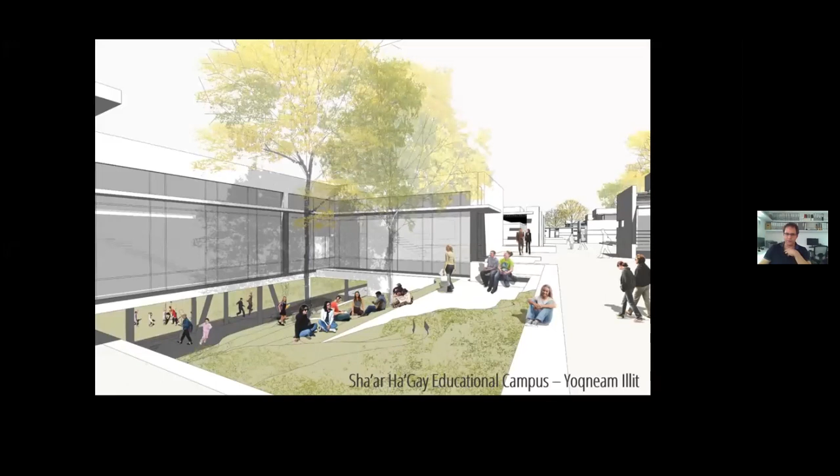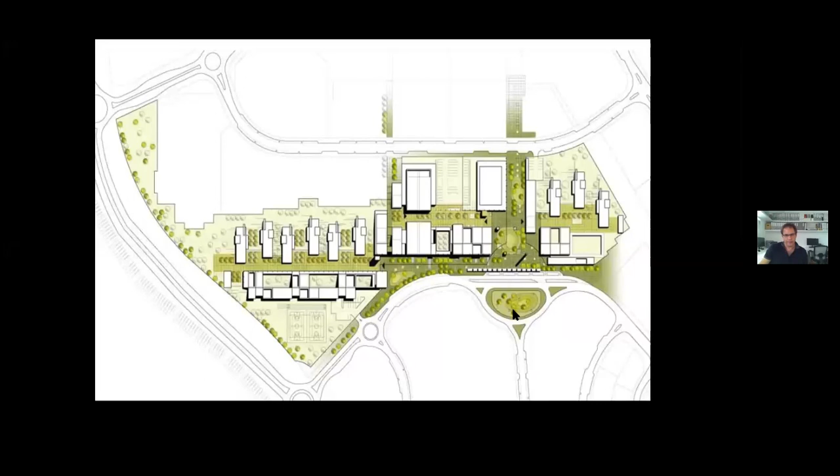Ever since we started our practice in 2005, the first thing we did was participate in an architecture competition for the design of a quite big educational compound in the northern part of Israel, for which we gained second prize. It was very surprising for us, being the first thing we did upon establishing the practice. Even though we didn't get the project built, it was clear we wanted to establish ourselves in public buildings rather than other aspects of architecture, even though for young architects like ourselves, it's usually easier to start with small projects, above all single houses.

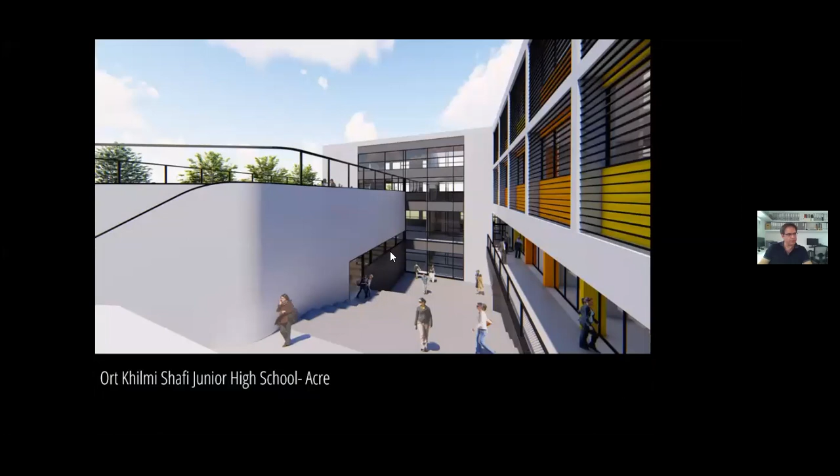So we did also that, single housing, but never stopped reaching out for architectural competitions, because we thought that would be the best way for us to get into this field, which is usually handled by more experienced and bigger offices.

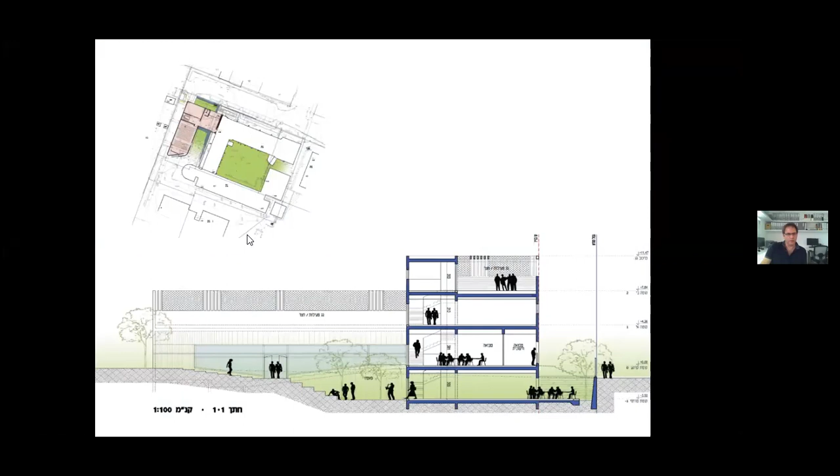Here I can show you an addition of a wing to an existing school in the city of Akko, an ancient city in the northern part of Israel, an old town. You can see here the old moat with an existing educational compound to which we needed to add a laboratory wing to an existing junior high building. So we thought to have it around an inner court, giving this school an additional and valuable inner space as well as the building itself.

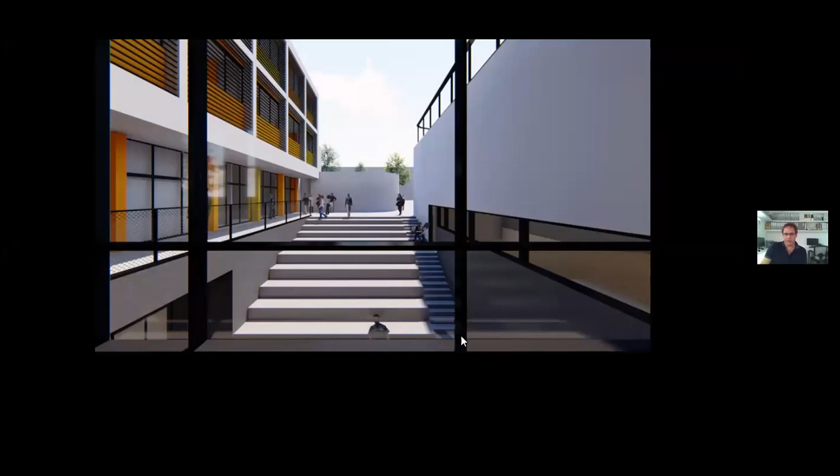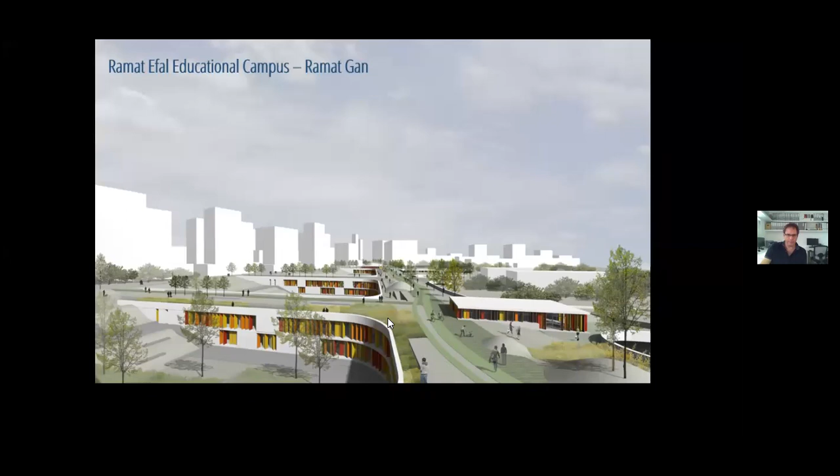Another educational building was this school in Ramat Efal in the center of Israel, where they had this big park where the project should have suggested a school. We thought to leave the park to the civilians and construct the school underneath, making the two projects work together.

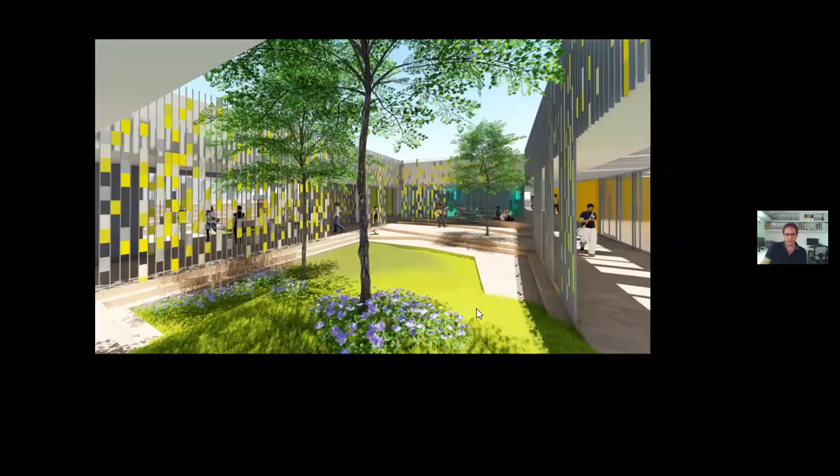Another school, the School of Music in Akko, still Akko, the town from before, is focusing on inner courtyards, which are very typical of Mediterranean old and ancient towns and cities.

Among the competition entries, we also managed to here and there get a hold of projects that we were able to construct.

This is a daycare center in a very dense neighborhood in Haifa, one of the three biggest cities in Israel. Most of the neighborhood looks very dull and unnoticed in colors and shapes. We thought to landmark this building by introducing unique colors that would attract attention and make it a landmark in the midst of the neighborhood.

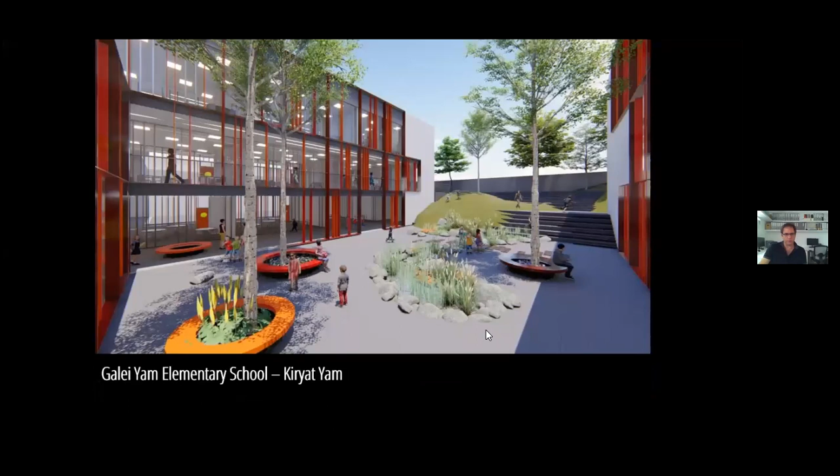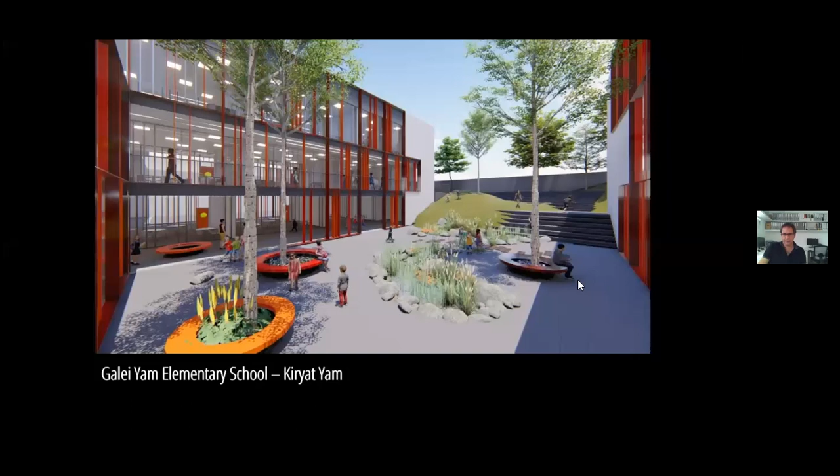Another competition that is currently undergoing, we're waiting for the results to be announced, is another school in Kiryat Yam, another northern municipality in Israel. It's an urban school, meaning high rise, and we tried to make it with as many courtyards as possible to open it up given the lack and shortage of spaces.

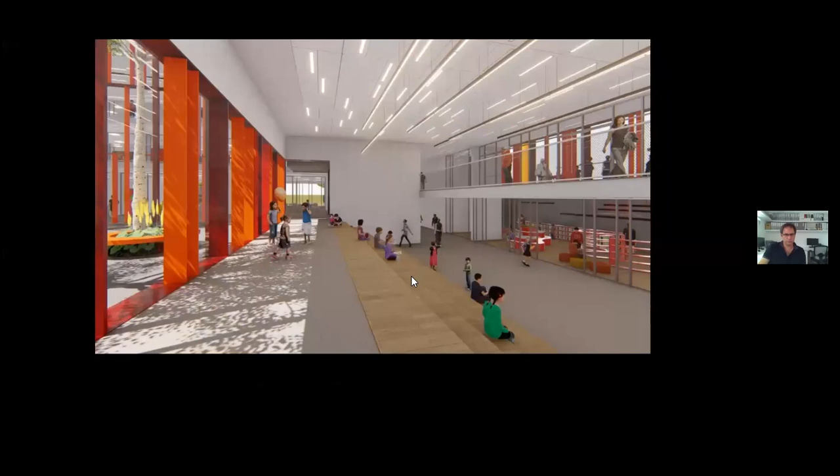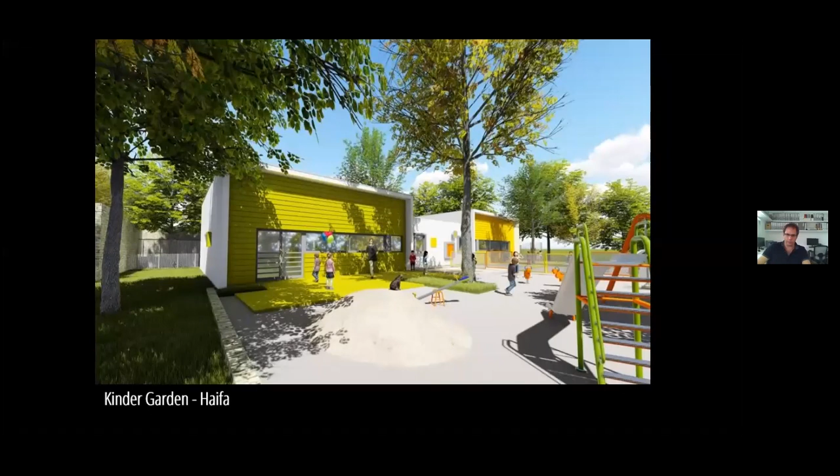Many kindergartens as well as daycare centers were built in Israel in recent years because it's a very growing population. This is an example of one such kindergarten, which was not realized in the end.

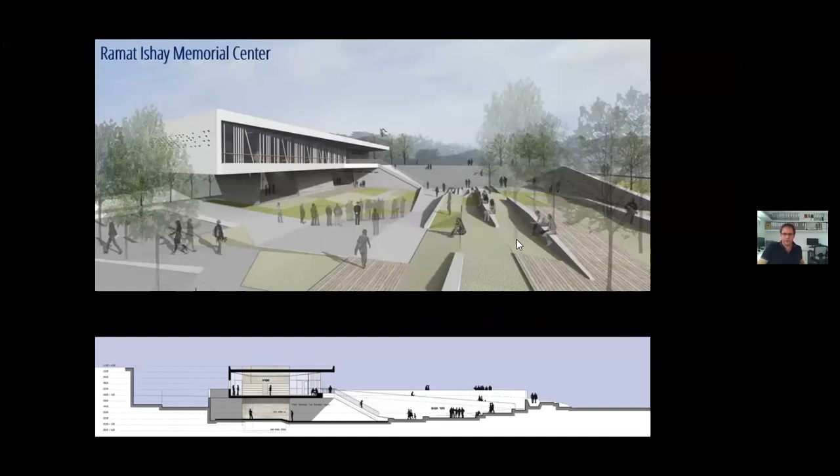A memorial hall in a very small town. It's a small memorial hall, also a competition.

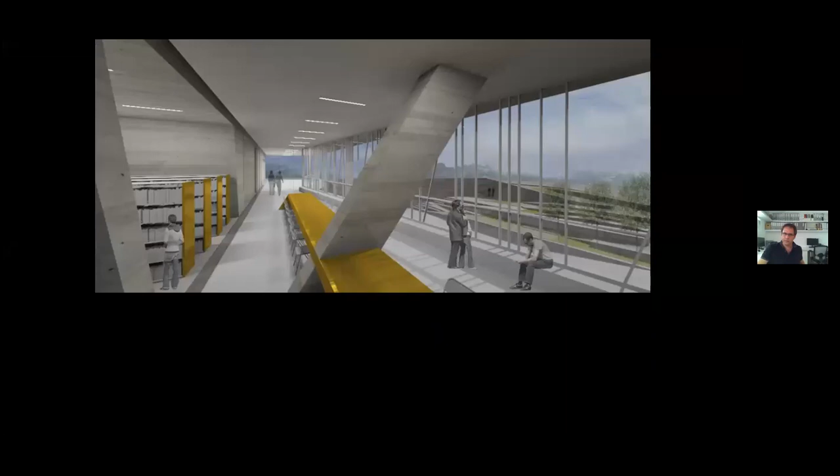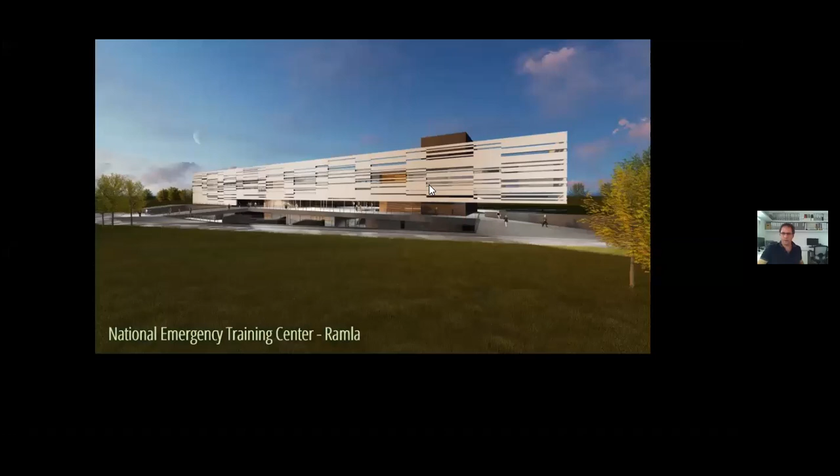And last but not least, a competition for the design of a national emergency center in the center of Israel, where they should train the municipalities to handle disasters and extreme situations such as earthquakes, tsunamis, and wars, including launch of missiles upon the civilian population.

So let me now continue. You see this? No? Well, I'm having some. Okay.

I will now elaborate on a project that we recently finished in the city of Haifa in northern Israel. I don't know how many of you know Israel. Haifa is the third biggest city in the country. It's not far from the border with Lebanon. And the project is in the midst of the metropolitan center. It's a port city, Haifa.

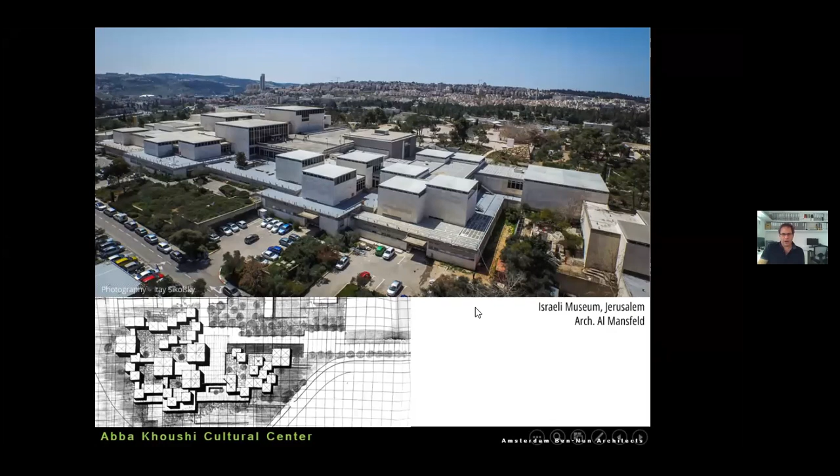And the current cultural center is called the Abba Khoushi Cultural Center, which also answers to the same conceptual themes of structuralism.

It was originally designed as a very big balcony, with the entire project dropping below, and one would access this balcony from the street and enter these pavilions and go down for all the functions and possibilities that were underneath it within the center itself. It was sitting on the slope, and this way the slope could hold all these spaces and functions.

During the years, this balcony was leaking, and all the water went down to the halls below. During the year, the municipality had to cover it with a roof in order to prevent water from going in. So this space formed beneath this roof was kept like that for many years, provisionally used for various reasons, but never really taken care of systematically. It was very hot in summers, very cold in winters, not air conditioned, not properly serviced by electricity — a very potential resource that was never used. Our mission was to convert this into a functional part of this cultural center, which is very important in the life of the city.

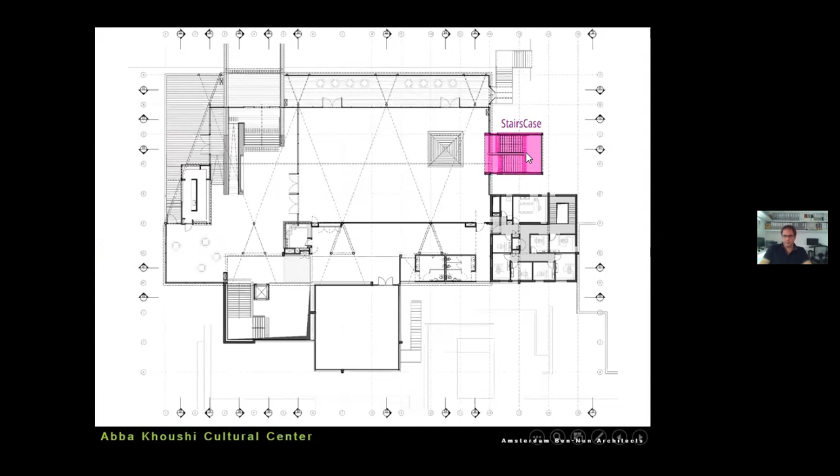Another important thing was to add a connection between the upper floor and the lower floor where the main auditorium exists, which was not under our mandate of design. Up until that moment, people would go from the entrance straight to the stairs below and make their way to the auditorium in a non-direct way. So we found this spot in order to add these stairs, only to find out it was above the route of a street going underneath this existing cultural center. So it had to be taken under consideration regarding construction methodology, etc.

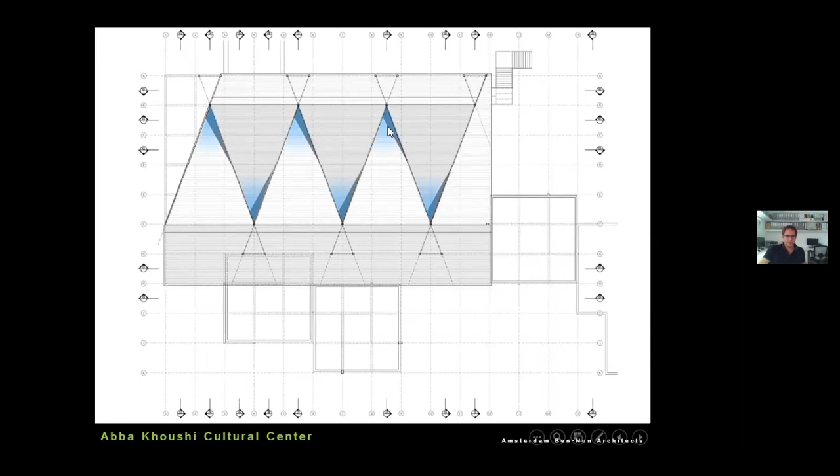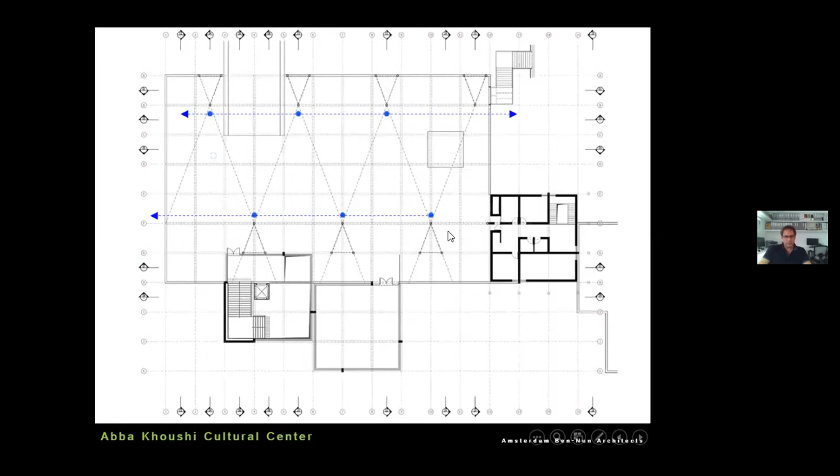One very important aspect of the design was that the existing roof, constructed about 20 or 25 years after the original building was completed, had a geometry that created 6 basins of drainage. These 6 basins of drainage were falling inside the perimeter of the existing hall. They used to solve this problem by putting in drainage pipes that would take the drainage from all these basins and get them outside. We didn't want to maintain this solution, because we knew the minute we made all this renovation, all the leakage from these pipes over the years would continue within the renovated building, and that was out of the question.

So what we did was analyze the structure of this very unique roof and found that, as shown in red — the existing trusses — if we heighten the ridge within the axis at the center of this roof, and add supporting trusses above the existing one, we can change the drainage scheme of the building and send the water outside its perimeter. That was a very important decision to make.

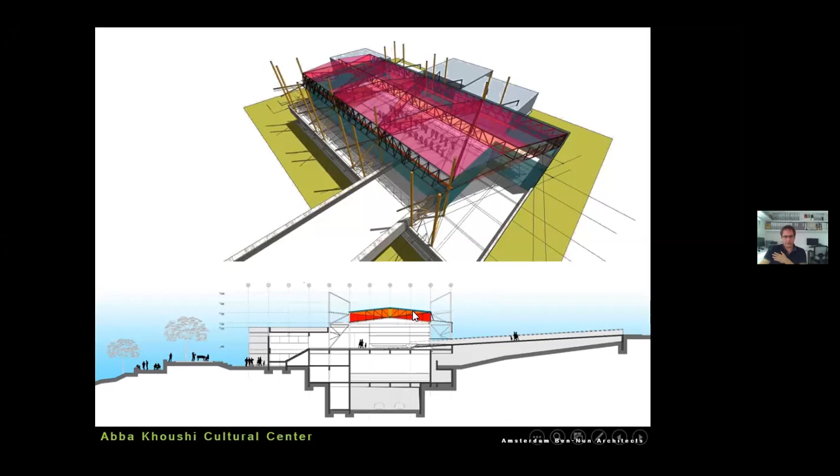What you see here in orange is the gap between the existing roof and the new roof that we were suggesting. All the machinery — air conditioning ducts, electricity, etc. — could service the hall and the entire floor. And that's how the roof looks after it's finished.

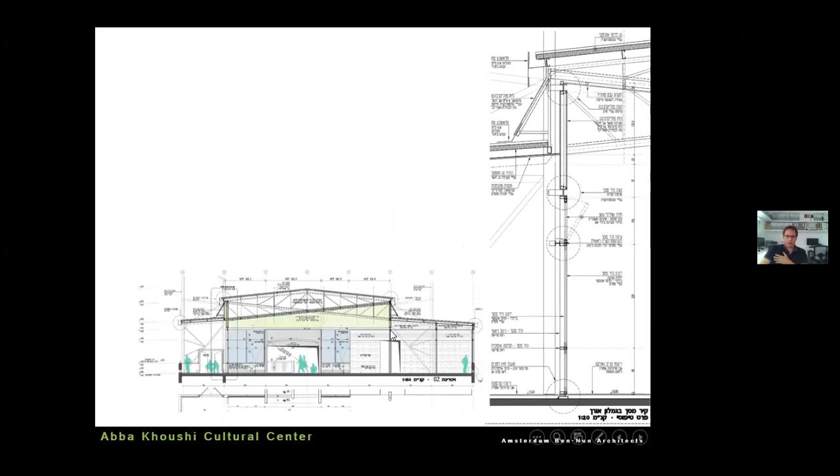I can show you here briefly the composition of the facades and the new envelope of the project. Up until 4 meters high, we have a curtain wall, and above are panels — you can see here in green — of polycarbonate, which gives a very unique light into the building.

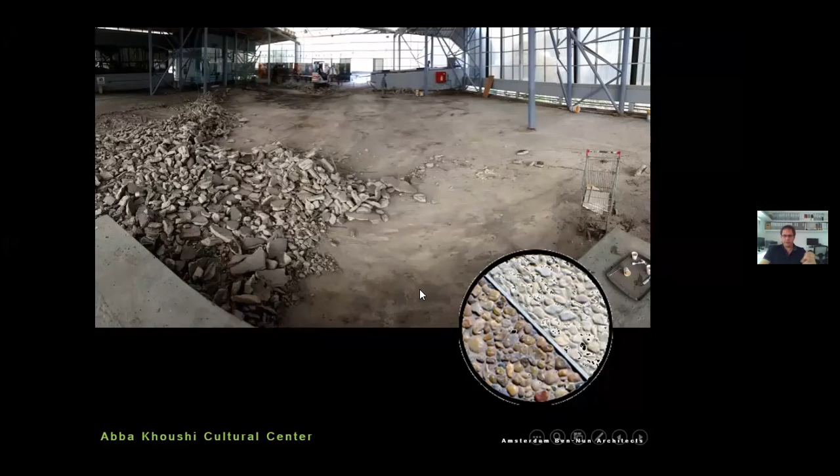One very crucial aspect of the decision was what to do with the paving, because the balcony was using an existing material we call granulite, a mix of aggregates and cement. That was the topping of the existing floor, and it was undulated because it needed to drain the entire surface. According to the construction engineer, we couldn't add anything above it other than terrazzo epoxy of 2-3 millimeters, because he feared the original structure wouldn't hold more. So ultimately it was decided to destroy and eliminate the existing 10 centimeter thick concrete with aggregate floor and introduce a new stone pavement.

You can see photos during the construction. It was quite a challenge to construct within an existing, functional building. It functioned during all the time of construction. People used to come here and go through this construction site to their activities.

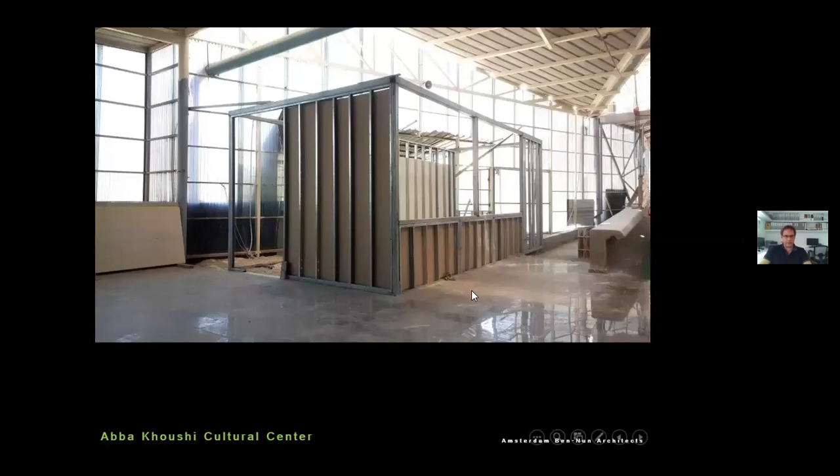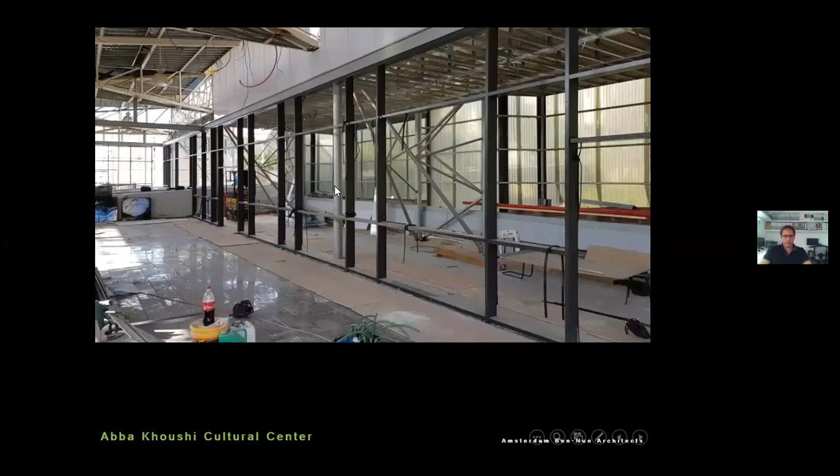This is the cafeteria under construction. And here you can see the main hall before it was covered underneath with the new ceilings. The construction of the curtain wall undergoing. And here, I emphasize, the duct of the air conditioning going into the gap between the two existing roofs.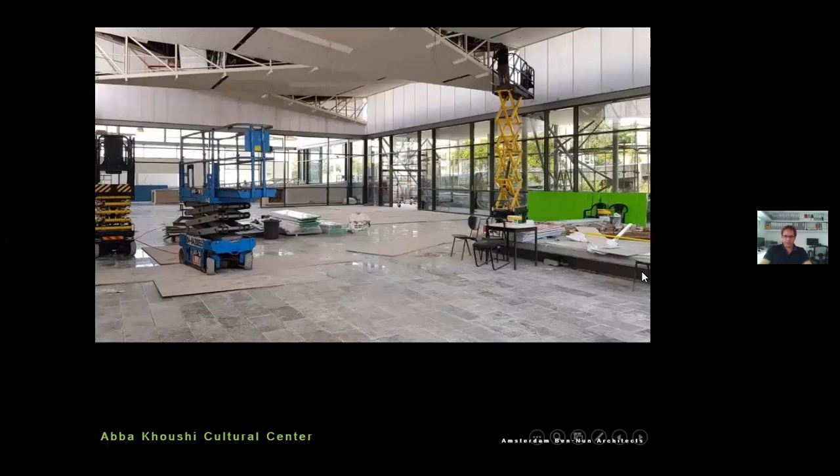Step by step, they finished closing and covering the entire gap. You can see the light going through the polycarbonate panels and the beginning of the fenestration of the curtain walls. An outer photo reflects the additional new trusses upon the existing ones, creating the much wanted new scheme of the roof.

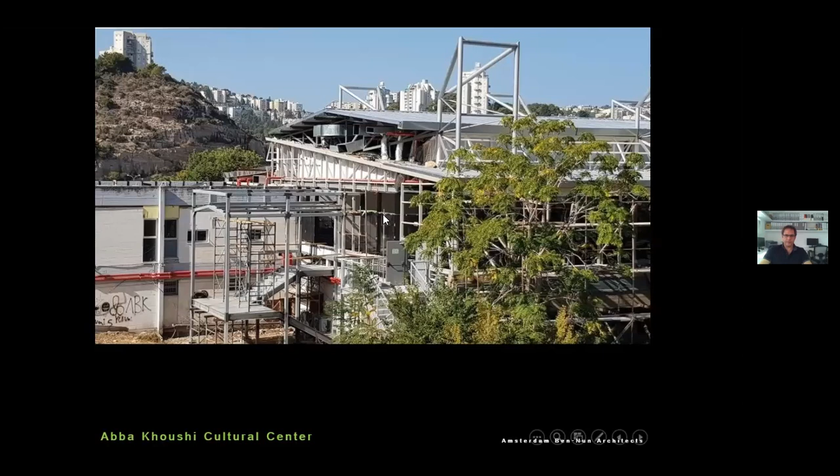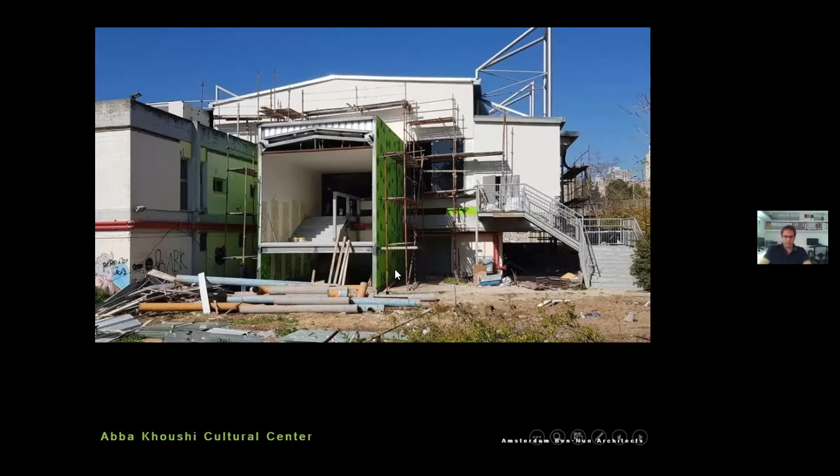Here you can see the edges of the air conditioning system before they were connected to the main units. The construction of the staircase volume, ultimately constructed with steel instead of beton, cement.

And a look to the neighborhood designed by Al Mansfeld, which is very brutalist, and was much recognized in Europe during this era of the 60s.

And those are already photos of the finished project after it was populated. The main hall here with the balcony overlooking the neighborhood, and going down from the stairs to the auditorium below. People entering the main lobby with the cafeteria in the background, and a view from the entrance towards the junction of the pavilions of services.

So at the end, even though it was not a mandate of ours to deal much with the external aspects of the project, we can see that it changed much of its look, because we tried to eliminate many additions that were not very current, not even with the addition of the new roof, which was to a large extent a bit foreign to the original design of Al Mansfeld.

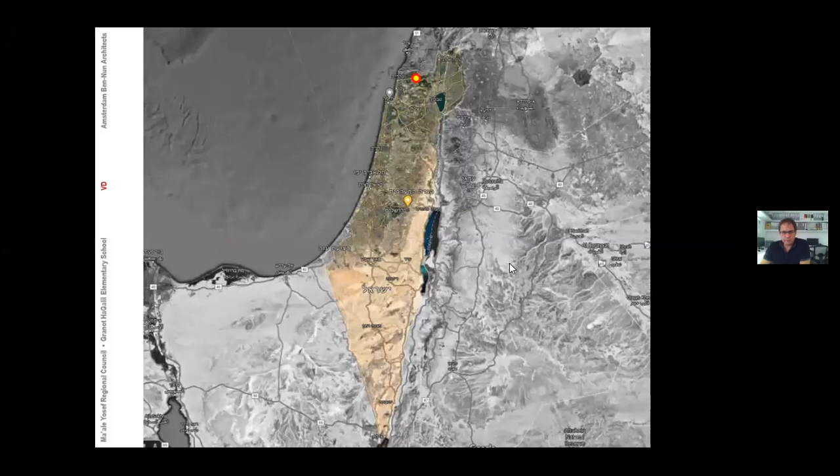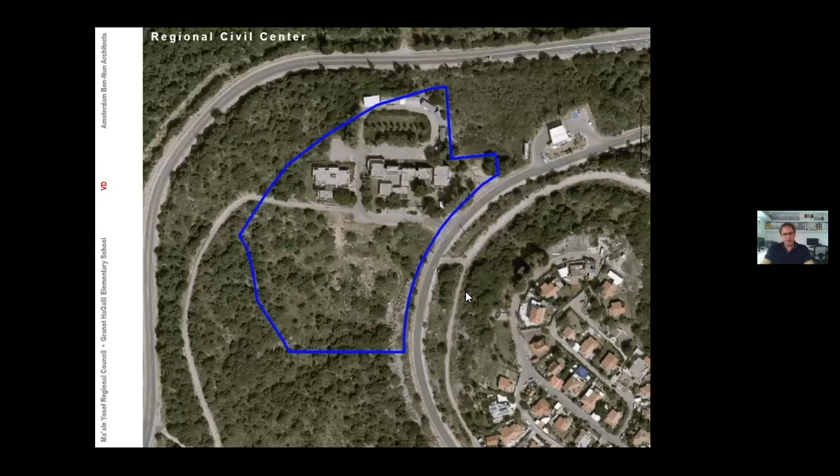So let me pass to the next project. It's an elementary school in the northern part of Israel, very north, extreme north, right on the border with Lebanon. This school is about to begin construction - it began 2 weeks ago after a very long process of design. It was the result of a competition we participated in 2017 and won first prize for, and that's how we got the project.

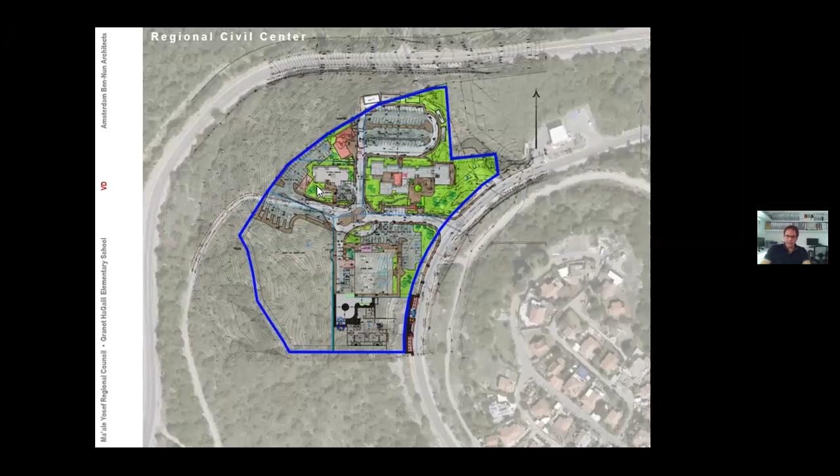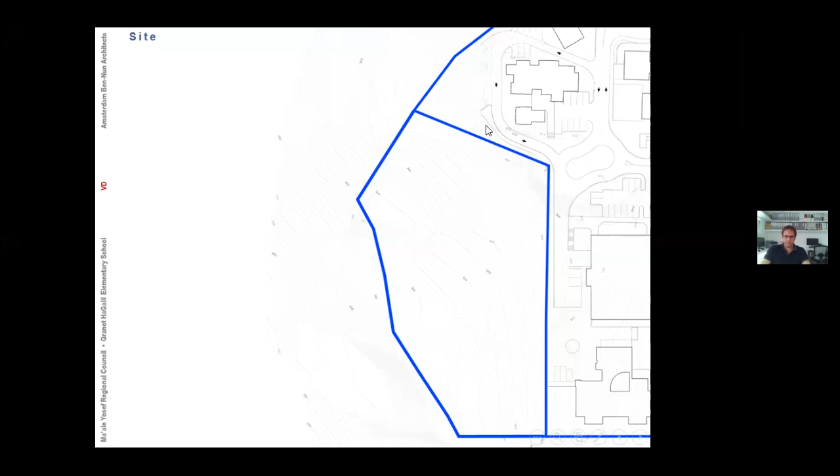It's held within the civilian center of a regional council in the northern part of Israel, where they have the offices of the municipality, an existing sport hall, clinics, and they wanted to construct the new school at this designated plot. This plot is characterized by an extreme slope going from east to west of about 15 to 20 degrees, and about 7 degrees from north to south. It was quite a challenge to introduce a school based on high accessibility for children, not just for people with disabilities - that was the main challenge in this project.

As you can see, there are three main wings, like fingers, consisting of this school, plus two structures in the east that serve as the administrative wing. Each wing building is a building of classrooms - it's an elementary school from first grade to sixth, so there are 2 grades occupying this building, 2 here, and 2 here. The reason it's divided into 3 is because the Ministry of Education in Israel is the main financier of schools in the country, and it demands that each school be accomplished in 3 phases according to its rate of financing. So they give money to construct the first phase, then the second, and ultimately the third - that's why they call it a growing school.

This scheme derives mostly out of these constraints. You can see here the way a typical building holds the ground. There is a fall of about 10 meters along the average length width of the slope, which makes it very challenging.

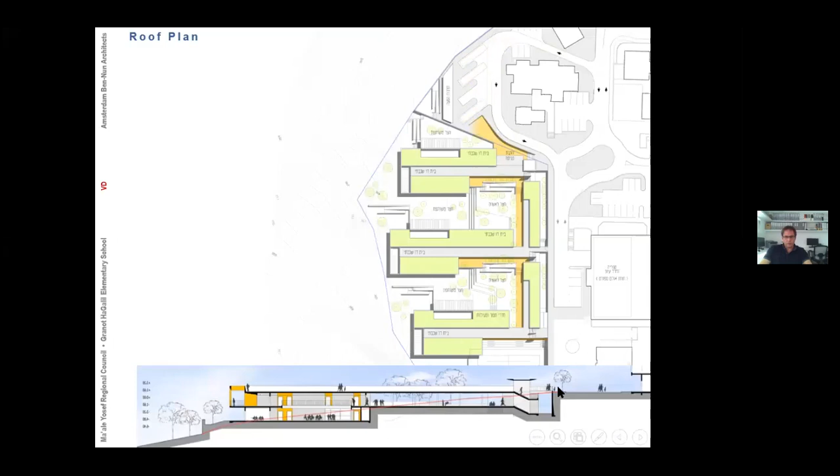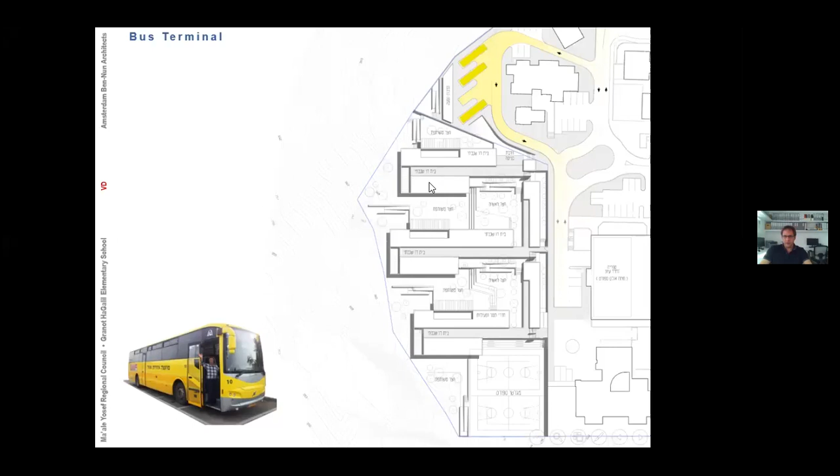We decided to locate it near its original school and municipality, since students will come by bus. We thought we needed a better bus terminal than the one suggested by the authorities, which would be on this plot. With all these constraints, it would be very difficult to spare space for buses here, so we suggested locating them beyond the plot designated for the school, in a vacant part of the center, from which it was easy to access the school's entrance.

What we have here, as you could see in one of the beginning slides, is that we are sitting practically in a Mediterranean forest, a very green one. We thought of combining the constructed and the open, allowing nature to reach its hands inside the school while we reach our constructed fingers toward nature. That's the scheme of open and built.

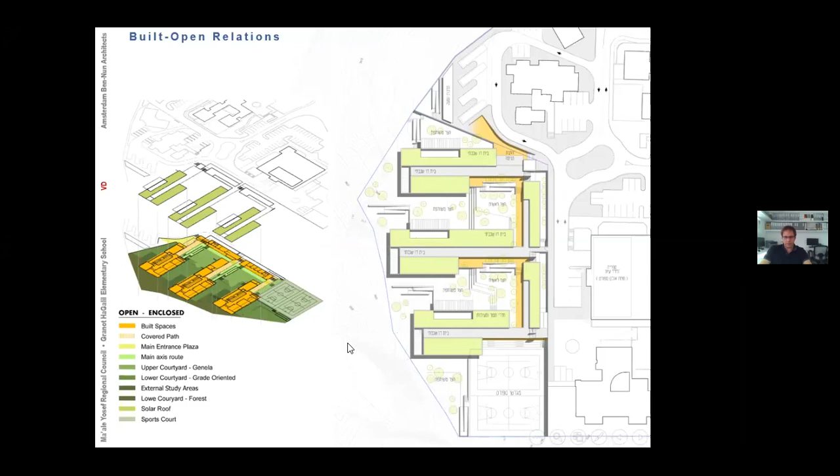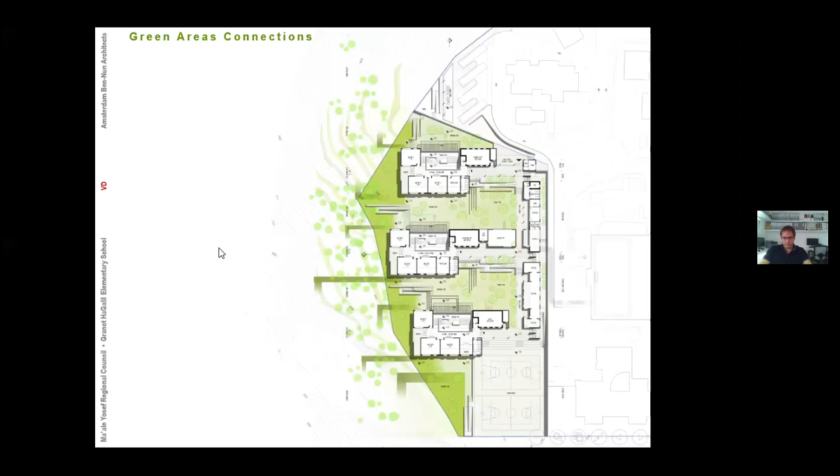Here you can see the overall floor plan of the upper floor. The structure of the school, from entrance to its bottom, is a street-like walkway upon which the classroom buildings are split and evolve.

We chose to deal with the 7% slope from north to south by grading the buildings about half a floor. If a floor from bottom floor to main floor is about 3.5 meters, the buildings are lowered half a floor, 1.75 meters from one another.

We handle those gaps with ramps and with elevators. Each building has its own elevator, and thus handles all the leveling of the site.

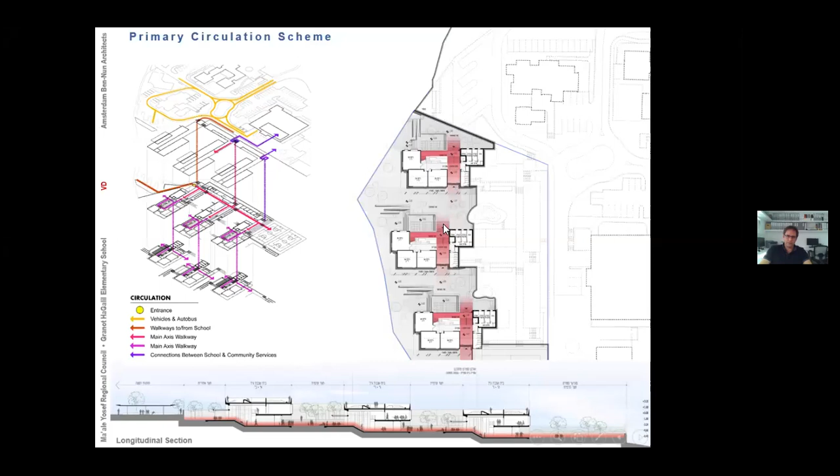We allowed for a path going from the upper courtyard of the smaller children in the school, first and second grade, up until the bottom of the school via all these buildings. There's a track you can practically follow, going down the stairs, following the entire school as you go.

A typical yard between the buildings.

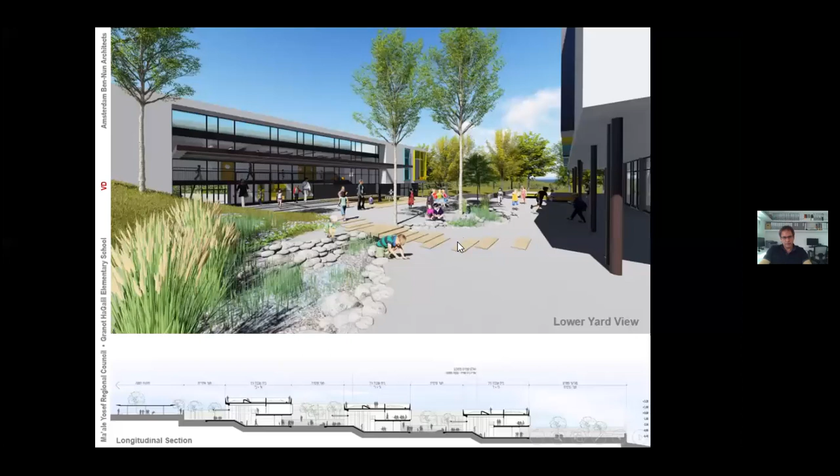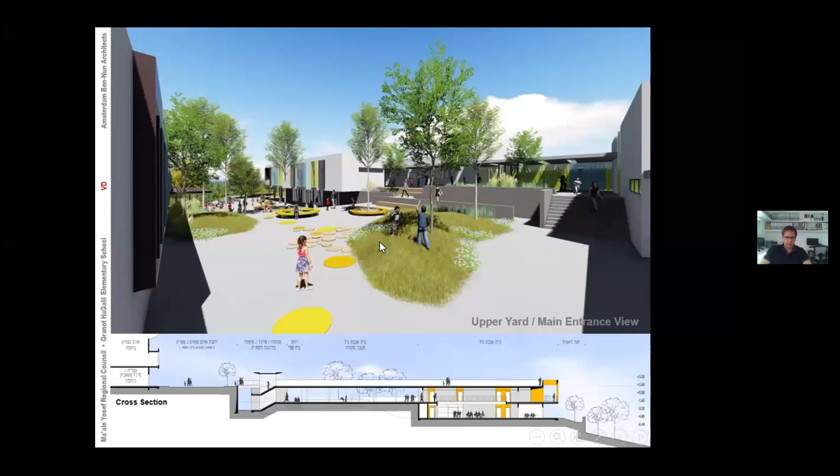We harnessed the natural drainage basin of the school with landscaping that holds the water. In some cases, I'll show you a constructed example in the next project. It functions, and it gives teachers a basis for education upon this natural aspect of drainage of the plot.

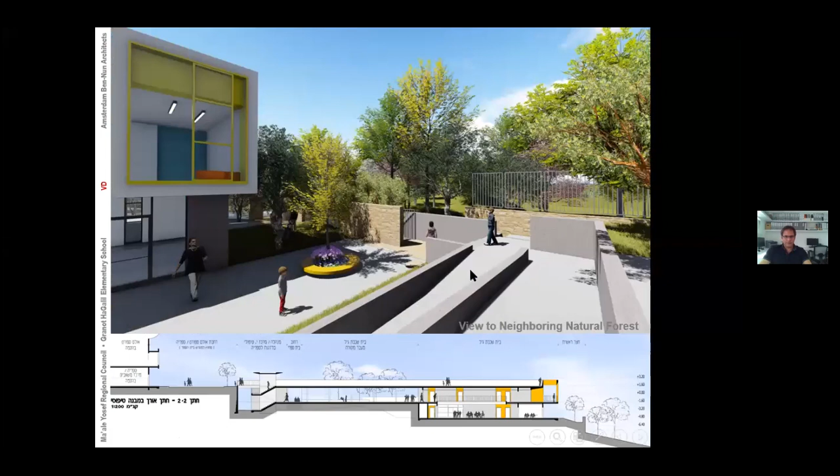Beyond the school fence is the forest, the nature, and the municipality wanted us to allow for an opening so the teacher can take kids for a walk in the park or forest, leaving the school not from the main entrance but from its perimeter.

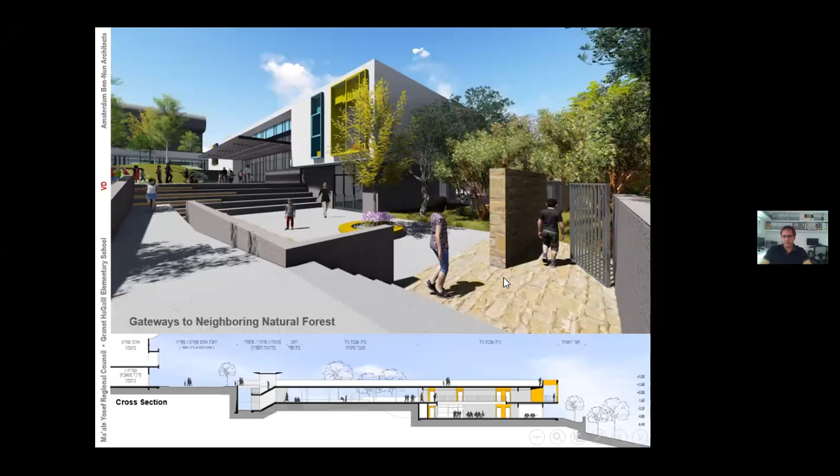A very important aspect of the site's development is places where external classes can take place, because this school was part of an innovative pilot by the Ministry of Education for about 10 schools around the country, where the whole concept of education differs from the regular educational system. The main aspect is that learning can be done everywhere, not just within a classroom, but also in non-formal spaces within the building, and above all, in external places adjacent to it.

So we used all these differences in the levels of the site, due to its topography, to create many amphitheater-like spaces where the teacher can give a class outside.

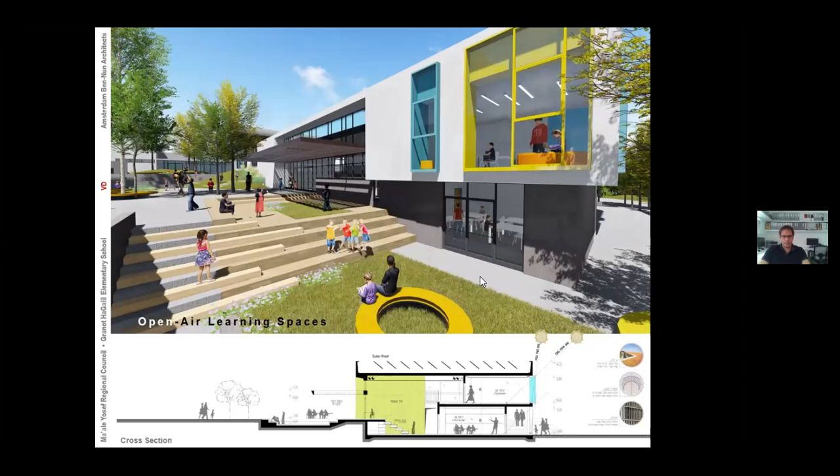Let's take a look at a typical building. The tail adjacent to the main street, which varies from building to building, holds global and public functions serving the entire school. But the front of it is a two-story wing, which is, let's say, the private home of the children who study in this particular building.

You enter the building at its upper level, where you find classrooms and communal gatherings. We designed the separations between classrooms as acoustic panels that can be removed, combining the spaces into one big classroom. This is also part of the innovative approach, meaning no longer a frontal lecture, but rather 2 or 3 teachers leading a group experience of teaching, or guiding the self-exploration of students under their supervision.

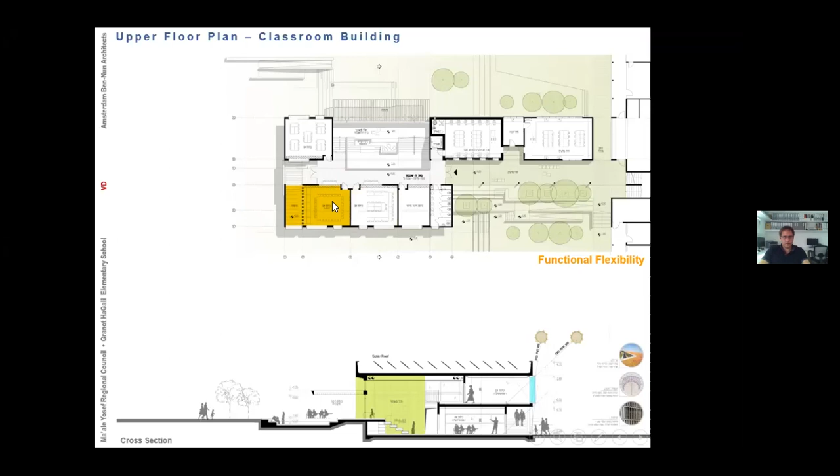On the lower floor is the next grade. If above, let's say, was fourth grade, beneath you find third grade. From that floor you can go to this yard or to the next one. This enables interactions between children of various ages, since this court is also shared with children from the adjacent building.

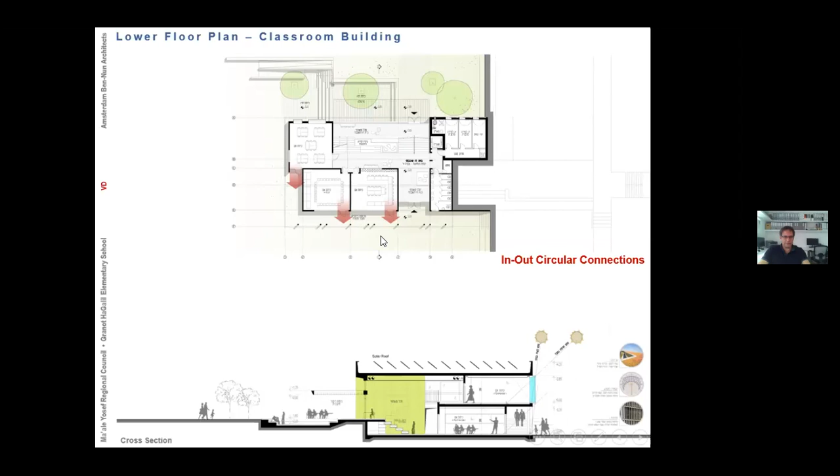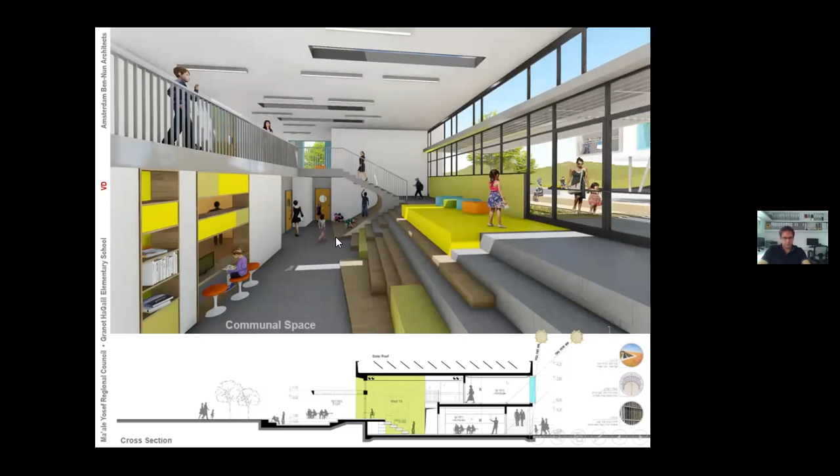Wherever possible, we allowed for a direct exit from the classes to outside. That's how the communal space of the entire house looks like, again a stepped space where you can hold a lecture or lesson, harnessing the slope of the plot. Here you can see in the background the main entrance from the street to this house.

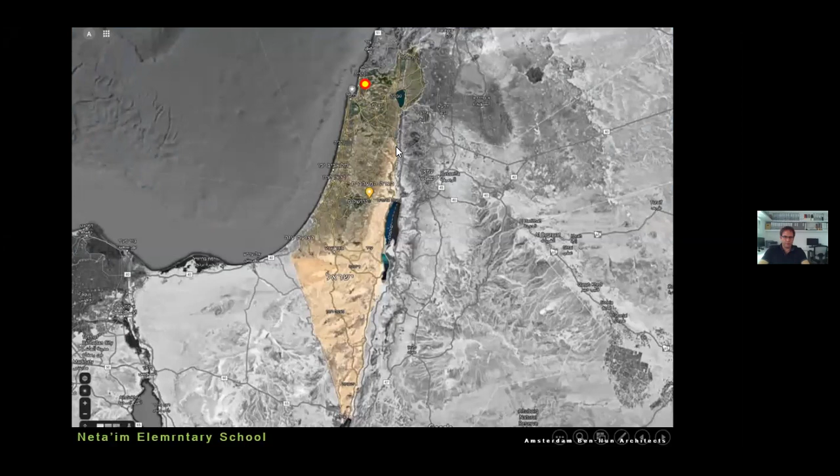I will now show you another school. This school was built and housed, populated in September 2018. It was the result of a competition that we won in 2016 for the design of another innovative school in the northern part of Israel. That's not far from where we live, but still, as you can see, most of our projects evolved around the northern part of Israel. So this is, again, a regional council, very much spread. Here in red is Lebanon, and the boundaries of this regional council are not very organized, let's say. This school was about to serve 5 or 6 small villages or settlements in its vicinity.

The plot here in yellow is in what we call a kibbutz. I don't know how many of you have heard of this form of Israeli settlement. It's a unique form. I suggest you go and learn about it a bit, because it's very interesting. It's one of the most unique forms of social settlements made by mankind. You guys have been visiting Auroville, I've heard from Mr. Banu. It shares a few similarities with these concepts. In this kibbutz, they designated a plot within the boundaries for a school, and they offered this plot to the local municipality, and they were about to construct a school here.

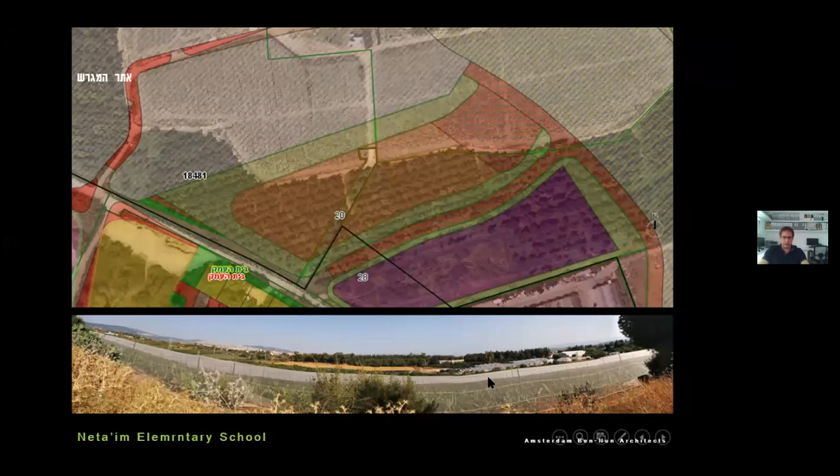So this is how the plot looks like. You can see these two colors: this is for the school, and that's for the bus terminal, because this is also a regional school. The kids come from different settlements by buses. And that's how it looked before construction began. It was an agricultural grove of avocados and bananas, and they were all taken away at the beginning of the construction, but we managed to leave a small strip of these circling this space. You can see it later on in the photos.

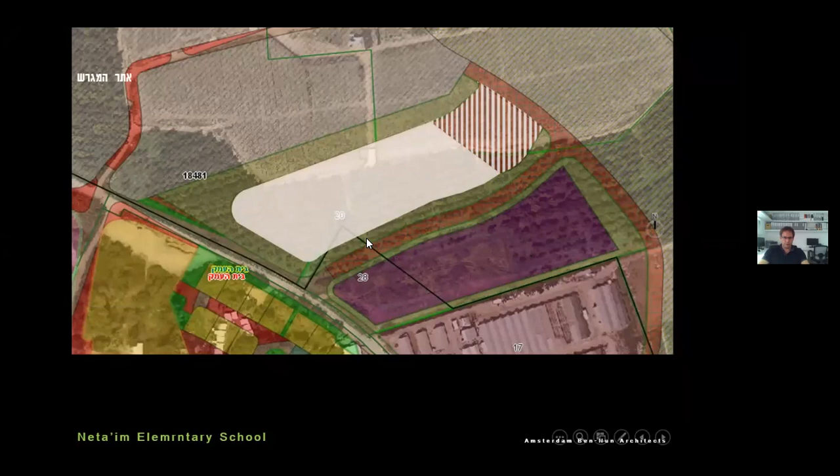So again, but on a larger extent than the first project, we divided the school into two main aspects. One is the administrative buildings, which also hold laboratories and communal studying spaces, such as the library and the science and technological rooms. This is management over here. And six different pavilions for each grade. You can see here the bus terminal. The entrance to the building, to the school, is from here. That would be later on the sport hall.

We wanted to separate those buildings by a system of external corridors that would connect the entire structure. The gross-to-net proportion here is almost 1-to-1, because there are no corridors and no passages which are not part of the external spaces of the school. The articulation of the buildings closes an inner courtyard, and it's a courtyard made of 4 fragments, each one related in this or another way to the pavilion it sits next to. But altogether, they make a system of open spaces.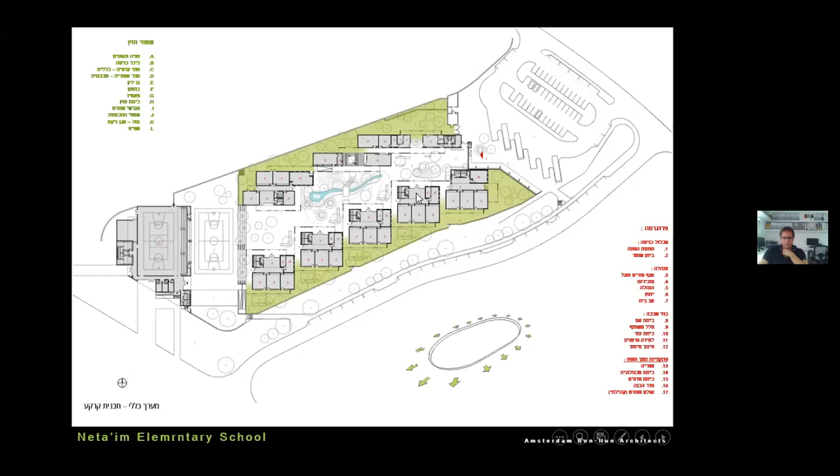This is where children from different ages meet, while on the outskirts of the school, each pavilion has its own private yard, made specifically for their own group of age. I will later on elaborate on the articulation of a typical pavilion.

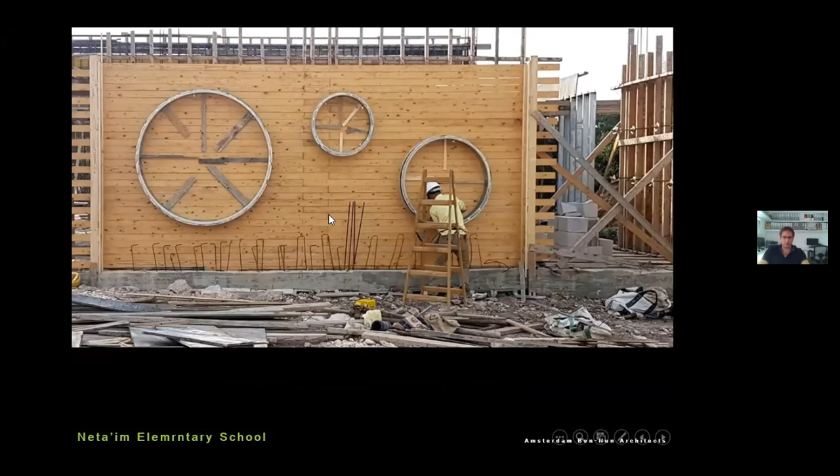So construction began, and as I said, we wanted to make a gesture to the kibbutz architecture, which is quite unique in the history of architecture in Israel. One of the things is the exposed concrete, which is very much common in kibbutz architecture, and has reached very high degrees of achievement.

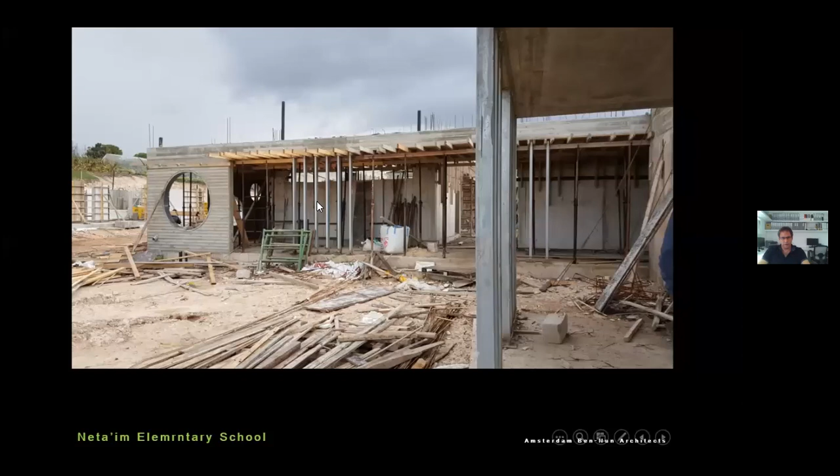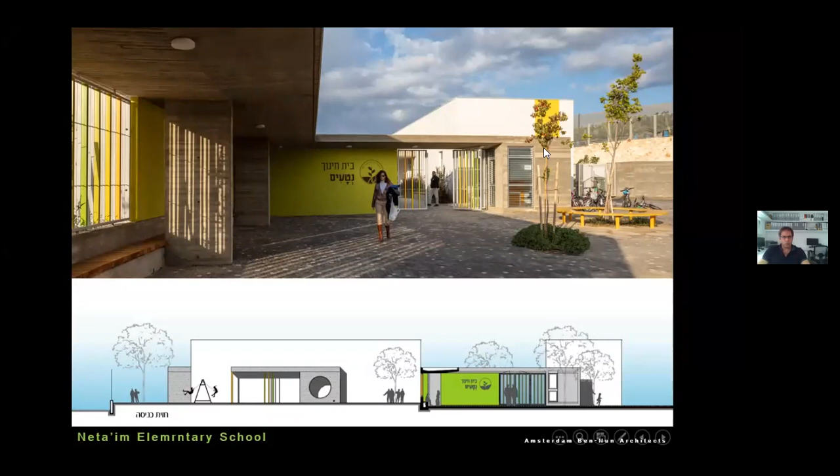Here you can see the entrance to the school, as I showed you on the plan. We wanted to connect it with the bus waiting sheds to make it an integral part of the school, and not just a leftover, which is usually how it's dealt with in other regional schools that we studied before designing this one.

So once again, the exposed concrete is a wing, and it revolves and creates the entrance gate of the school. You can see the names of the different settlements at the bus stop.

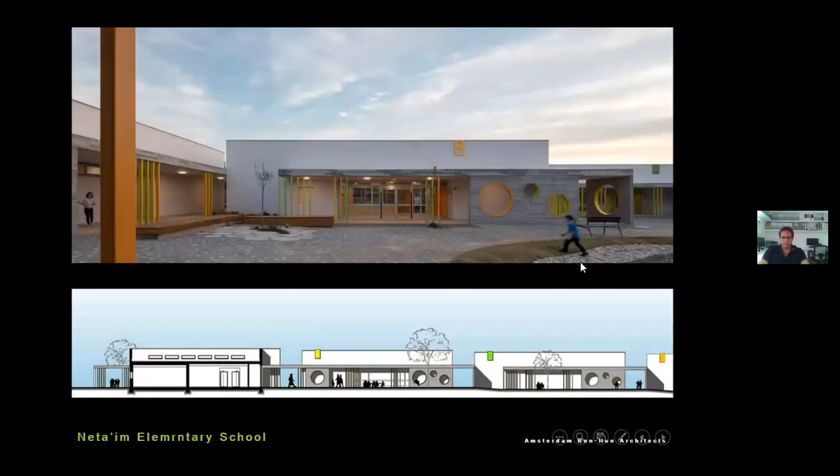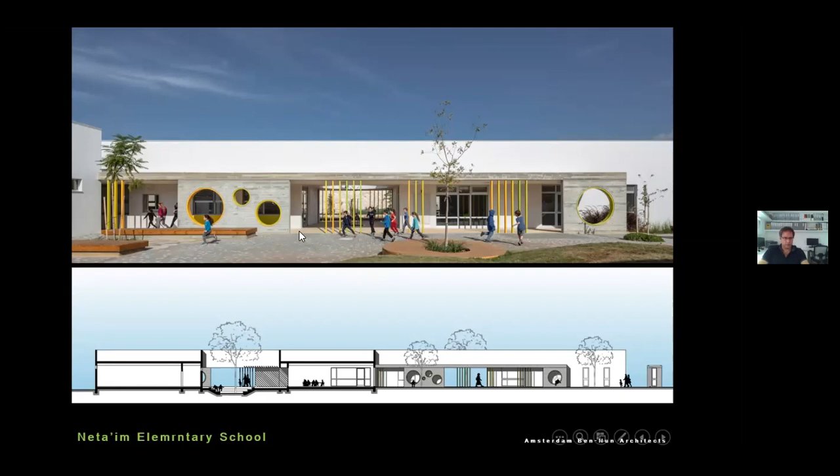And that's a view within the inner space of the school, which is a sequence of courtyards that create the integral courtyard. You can see in the background such a pathway, a corridor that is never really a corridor. It is always part of the space, only covered, a bit behind bars, a bit separated, but always part of the integral space within. So no closed corridors here.

This is the courtyard of first grade, which is always the grade that comes from kindergarten into the school, where also bigger children study, and they always need their own sheltered space designated just for them. There's some resemblance to the yard of the kindergarten.

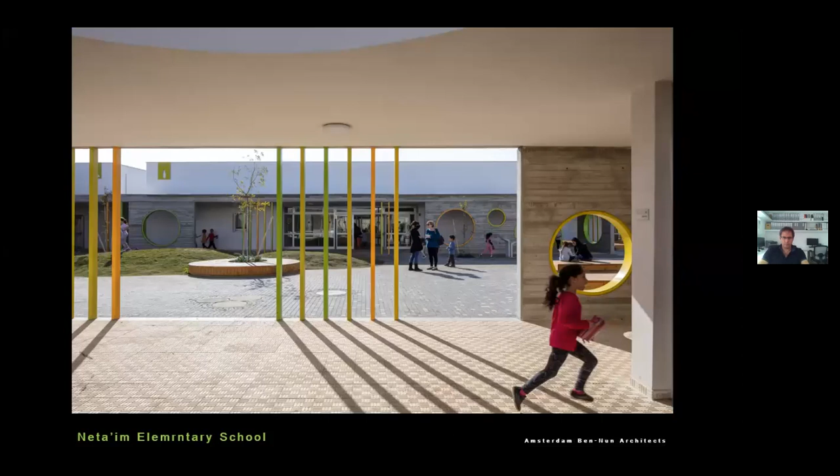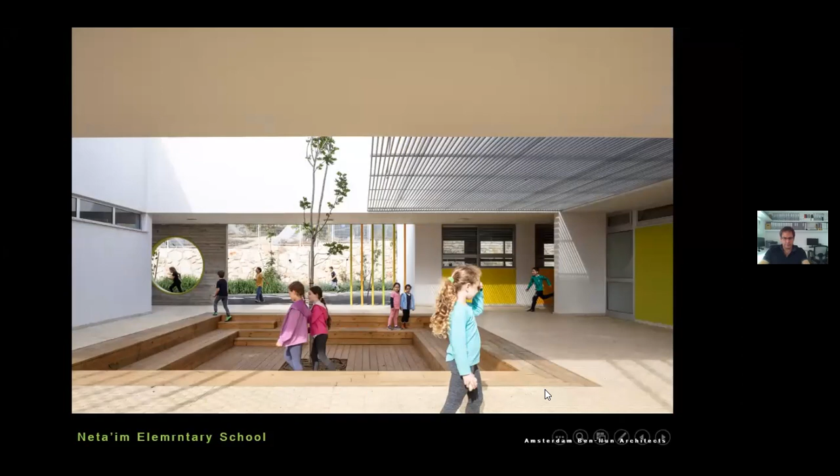We used many patios and open spaces within the structure of the school in order to create different kinds of experience and places where children can gather and learn. This school was also part of the first pilot of the Ministry of Education for innovative approaches in education, and it was very important to make place for external learning rather than just studying within the walls of a classroom.

You can see here in the background is the library opening up to this patio, where a teacher can take a class with the books and they can read here outside.

While here we see a private backyard of one of the pavilions, one of the grades, and they can go out of their classroom. There are 3 classrooms in each grade, and they can go out and have an activity here. They can leave the door open and do it both outside and inside. It was very important for us to maintain this hierarchy of open spaces, as well as the hierarchy of inner spaces that I'll show you in a minute.

This is such a pathway between two pavilions, connecting the internal square, the internal yard, which is more global, and the private one in the outskirts.

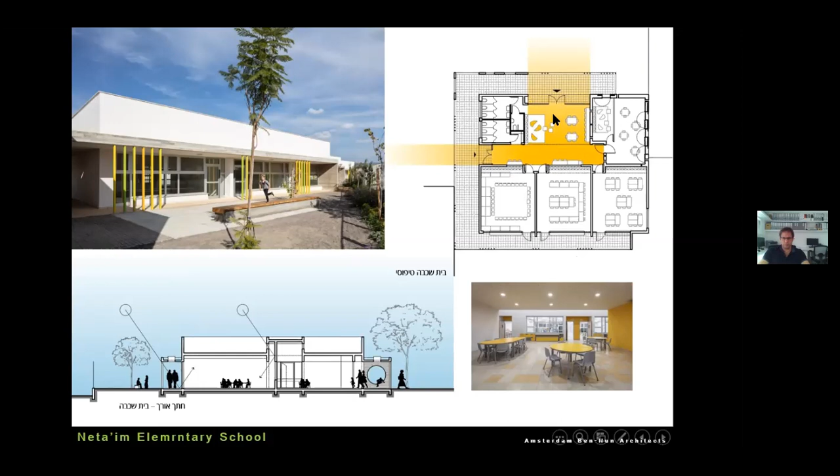This is an example of a communal space of a pavilion. You can see in the background the classrooms. They are transparent, so whatever activity is made in this classroom, you can take a few groups outside and maintain visibility and connectivity during the lesson.

As you can see, we've put a clerestory with windows for the circulation of hot air and passive ventilation, which is very important also in this aspect of the school.

And you can see also within a classroom, the clerestory windows, high windows above that are opened electrically and allow hot air to be released. This is a view from the classroom through the transparent wall into the private yard of this pavilion, allowing a teacher to have a lesson or conduct an educational activity both inside and outside at the same time.

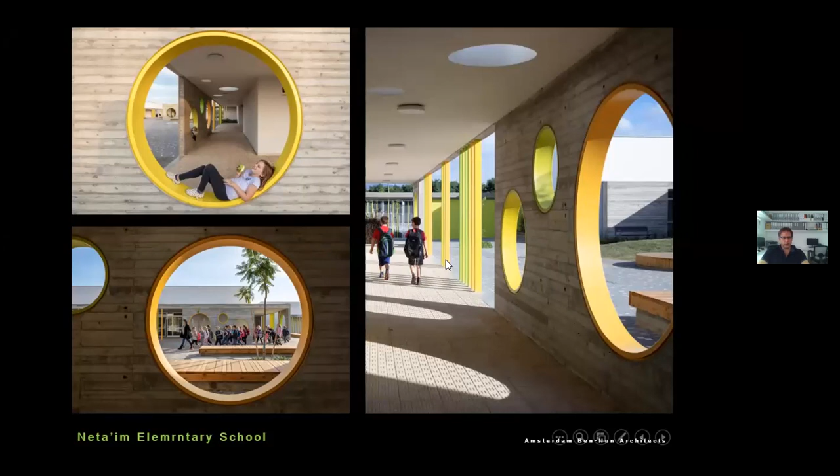You can see here details. We combined within these concrete walls those rings of metal, and as you can see, they are much appreciated by the children, and they play with it all the time.

As an architect, often you don't get to tell the story, but you create the opportunities. What is amazing about children is that you can trust them to always find things that you didn't even imagine to do with whatever environment you provide them with.

You can see here in the background, as I said earlier in the previous project, this main yard's drainage system, we harnessed it to create an artificial lake within, giving the opportunity to children and teachers to study what happens when in winter time this pond gets filled with water and frogs come and flourish within, and water flora starts to grow, yet it's part of the drainage system of the school.

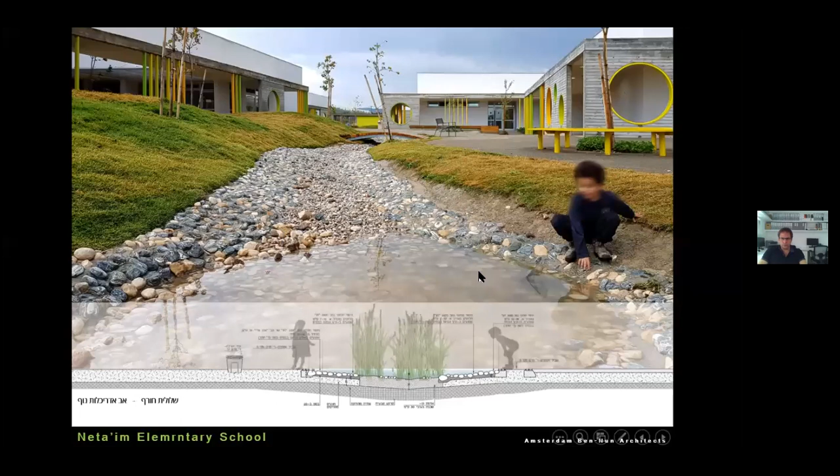And that's about it.

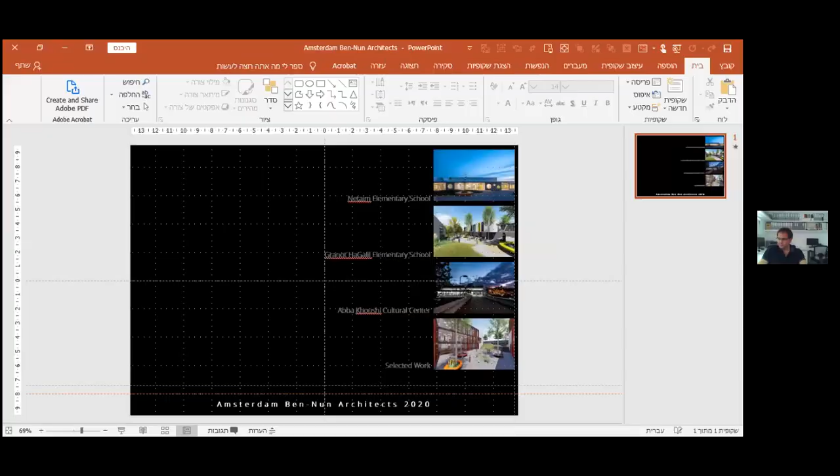Assaf, brilliant work. I mean, you just shown me a couple of photographs of the project that you have done, but since you have walked us through your entire projects, the way you have conceptualized and developed your drawings, and the kind of detail in which you have resolved and developed the project, I think you're up there with some of the best lecture series that we have seen and attended. So thank you very much.